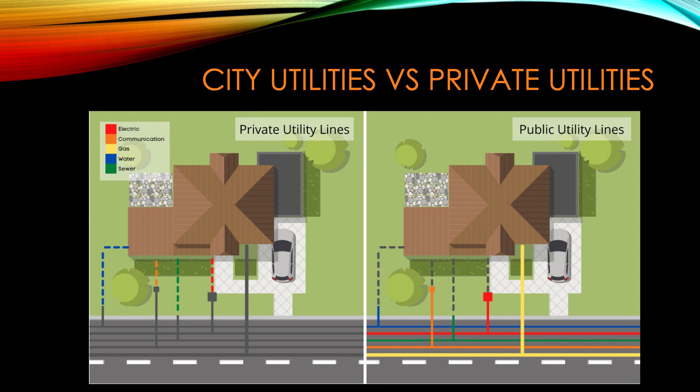Our sewer system - if you're on gravity sewer, the point of service for the city is closer to the street. If it's on a grinder station, the point of service is actually the grinder station. So we'll locate that all the way up into your yard and by your house, to make sure that if somebody's putting in a fence or palm trees or whatever for you, they're not disturbing the city lines and aggravating Joe and Eric.

We got another one on the left. You can see the green marks in the road, that's where our sewer line is. On the right side picture, you can kind of see a valve that's busted up into high grass, and if you look back in the bushes, you'll see a fire hydrant. So we own all the way up to the fire hydrant.

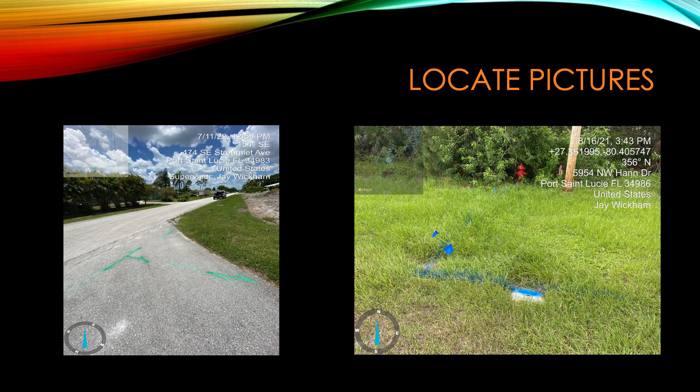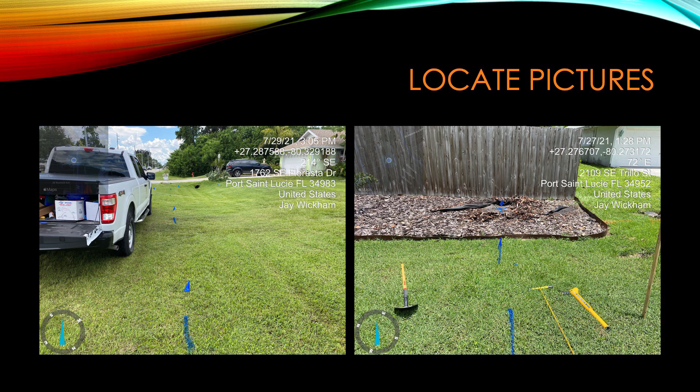Just another example. On the right side, somebody had mulched in a nice little thing right outside their fence, but the blue mark continues into it, and their water meter was actually buried under all that mulch. That's no fun, that's why you see the shovel out there. Our locator had to get out there, probe it, find it with a metal detector, and dig it up so we could have access to it. So please don't bury those.

This is what we're trying to avoid. Last year we had a contractor working on Port St. Lucie Boulevard, and we had an active locate, and it was good, but the contractor failed to see a valve, and when they were digging up the road there to do the widening, they busted the road.

On the right side, we have what's considered to be a 2-foot tolerance from the edge of pipe. So when we're marking these lines, we have to be within 2 feet of the edge of the pipe, otherwise the city is responsible for the fix. If it's within 2 feet, then we can usually hold the contractor negligent.

You can see our assistant director pointing at the fact that it was less than 2 feet, who happened to grace us in the back of the room, but he was pretty happy that day it wasn't a problem of one of my people, and it saved us a few thousand dollars that we were able to bill back to the contractor to fix. But it did cause a lot of headaches, because I believe that part of the road on Port St. Lucie Boulevard was shut down for almost a day, and that's no fun.

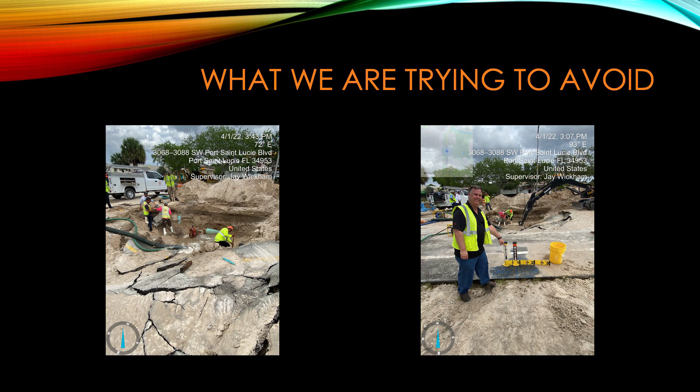So, the picture on the left, AT&T was doing a directional bore to bring fiber to all the people in the city, and they hit one of our old asbestos concrete water mains, and it shot a geyser up in the road above the telephone pole. Those ones are always fun.

And the picture on the right, you can kind of see the directional drill machine and the edge of pavement right there. I don't know if you can make it out, but you can kind of see the pipe in the ground. But we did not locate that one properly, so we had to eat that one, and get to sit in offices and have fun meetings when we're off like that.

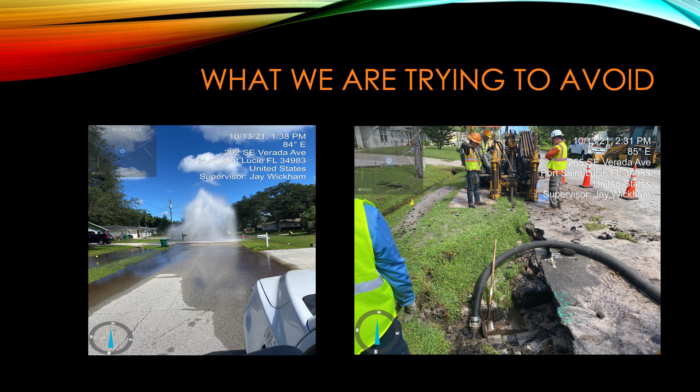So that's it for the locators. On the commercial development side, like I said, I have 8 full-time inspectors. In 2022, we had 96 open commercial projects, and we completed 4,737 inspections.

Now the 96 commercial projects, that's going to include - I'm not sure where everybody lives, but if you guys are familiar with Tradition, like Riverland's growing, so Riverland, one of their whole pods would be one commercial project. And then also, like when you see an Aldi's or something pop up, that's considered one commercial project. So 96 is a challenge to be everywhere and see everything that goes on at the same time.

So these are the required inspections that we do. On the right-hand side, this was a graph that one of our project managers came up with. But basically, we do a pre-construction meeting with the developer, the contractor, and everybody. We do a material inspection to make sure that everything is perfect and good before they put it in the ground. If there's a lift station, we watch the lift station be installed, first manhole set, and we just go from there.

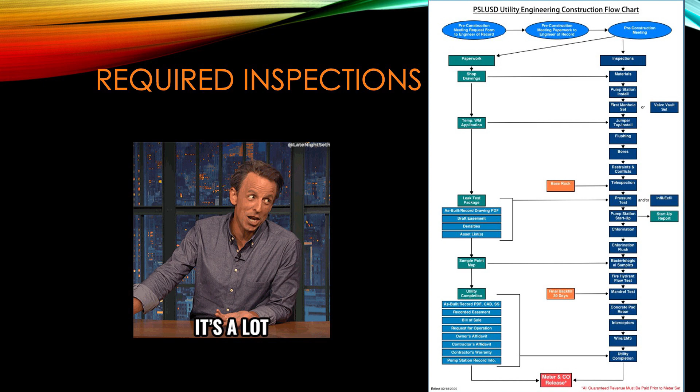We do a bunch of flushing and chlorinations and all that stuff before we turn water over, and try to keep everything separated from the drinking water that you guys are drinking out of. That way when they're doing all this testing, it doesn't contaminate the water that you guys are drinking or using. So it's a lot of fun.

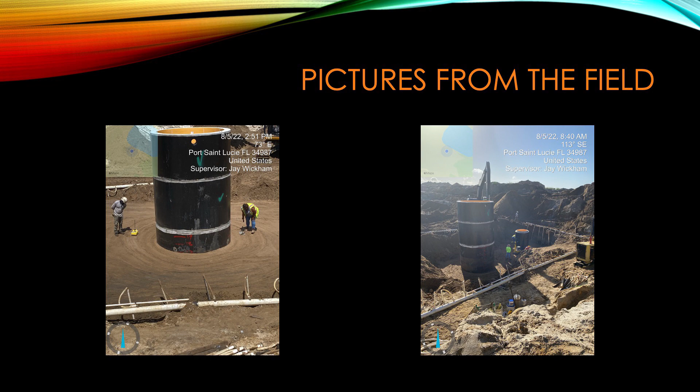So here's some pictures from the field. Both of these pictures are of a lift station being constructed out in the field. When you guys drive by these fences, you don't ever get to see the mass amount of preparation time that it takes to put these in the ground and make sure they're perfect. They come in sections, and they just put it together like a Lego set to get where they need to go, but they can be up to 30 feet deep around here. We try not to make them more than 25, but we have some that are a little deeper than 30 feet.

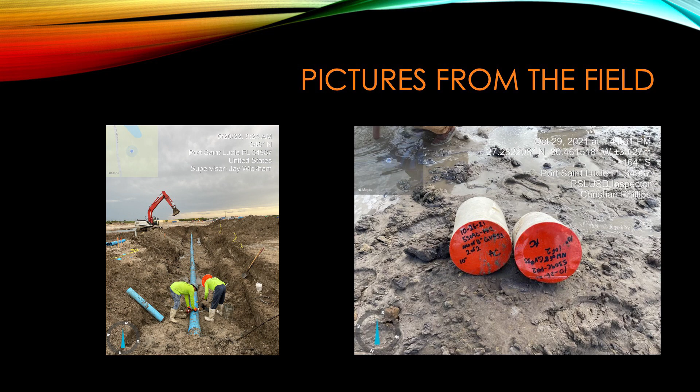I have a couple samples of that. Jenny's got one pig there, and the other one is the other style, the bullet-shaped one, but it's just foam. That one's a little harder foam, but that's what we use to get all the dirt out of the lines before we put the stuff into service.

These are clean, right? You clean these before I just touched them? These are clean? No? We don't pig the sewer pipes, so they're always clean.

This was a process that started during COVID. We had a major shortage in pipe, and we found out that when they turned the processing plants back on, they were so far behind that they just sped everything up and shot it through, and everything wasn't properly done. So the guys have been doing a good job making sure that we are not getting an inferior product. Unfortunately, this one was already installed, so the contractor had to go back, dig up the road, pull it out, and put new pipe in. But that's on them. We're going to make sure that we get the best product for the city so we don't have to keep paying for it down the road.

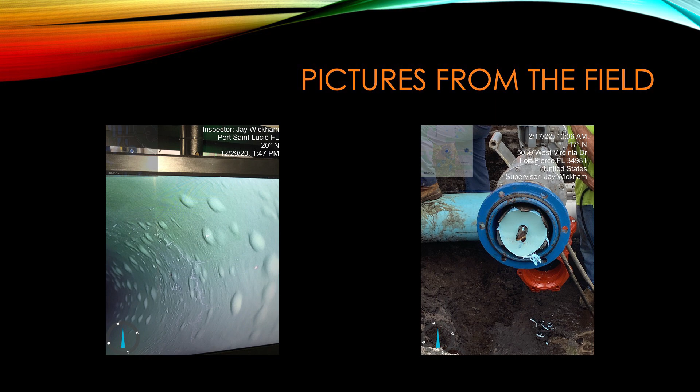I also have a demonstration of that, or a piece of that. This is the coupon that comes out from the PVC. You guys can see how thick the PVC is, but that's the outside of the pipe. And that's what comes out of that.

And then I always have fun pictures. This is more or less for my onboarding and orientation. I tell all the new employees stuff's going to happen. One of my guys backed into a tree, but always be sure to tell us when that stuff happens and don't try to hide it. That's what I tell the new people.

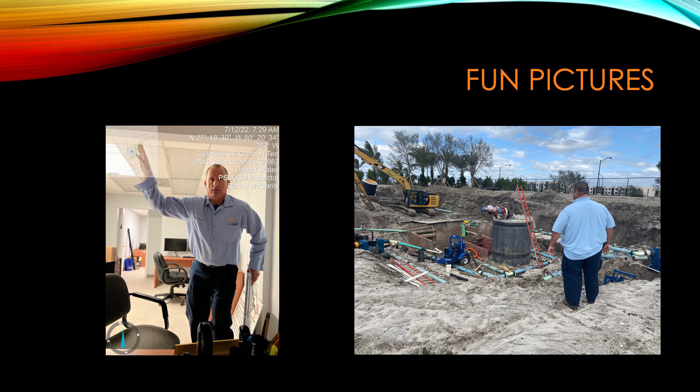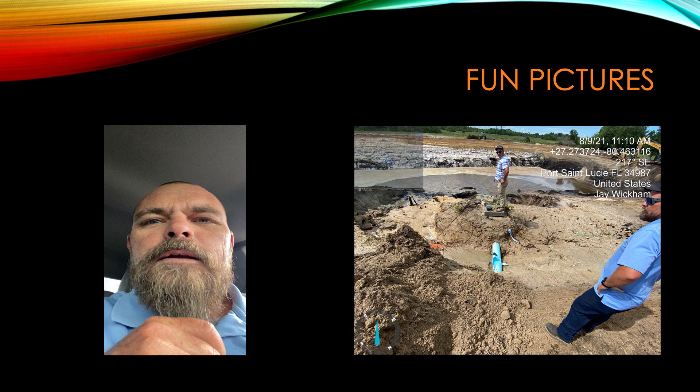We had to do Zoom meetings and Teams meetings a lot during COVID. On the picture on the left is another one of my inspectors. I always told him, you got to make sure your camera's off if you're going to look silly in a photo like that. Took it and put it up there for him. On the right, it's also Billy, another contractor on one of the jobs that was going to town and hit one of our water mains.

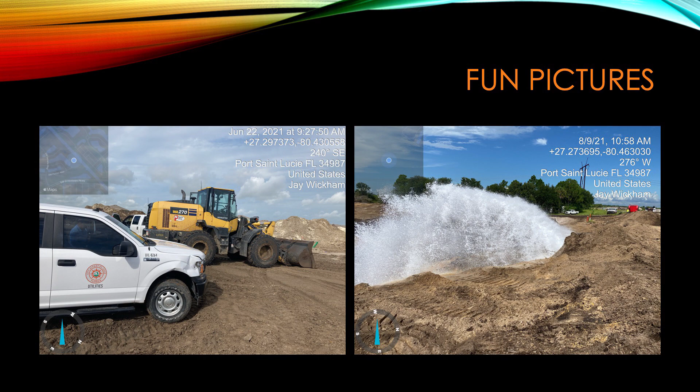So we're always having to go out into the field and dodge equipment. Well, one of our trucks didn't survive one day. It got backed into by that huge loader that's behind it. And you can see the picture on the right, that's also another water main break that happens on these new construction sites as they have water going through there and they're constructing it, people will come by and rip it out of the ground.

So that's all I got. If there's any questions, let me know. If not, I'm going to turn it over to Scott. Yep, very thorough.

All right, we're going to hand it over to Scott now. Thank you, thank you. Hi, everyone. I'm more of a behind-the-scenes type of person. I don't get to speak in public very often, so I appreciate coming out in front of some of the smartest people in PSL today. And I know you're smart because you're in the AC and you're getting a free lunch. So I appreciate you coming.

So once again, my name is Scott Mahar, and I'm the manager of Electrical Systems and SCADA. And as far as I know, the theme is underground, and some of my work, some of our data travels underground, is why I'm here.

I'll speak to the electrical part first. So I work with FPL, and I manage a lot of our rates for our plants. And the electrical service generally comes in overhead. And then on our plants, some of them are very diverse and large. They have many facilities on the plants, and that's all underground. And we have a lot of large pumps and large motors. They use a lot of electricity. So we try our best to manage costs so that those savings can be passed on to you, the customers.

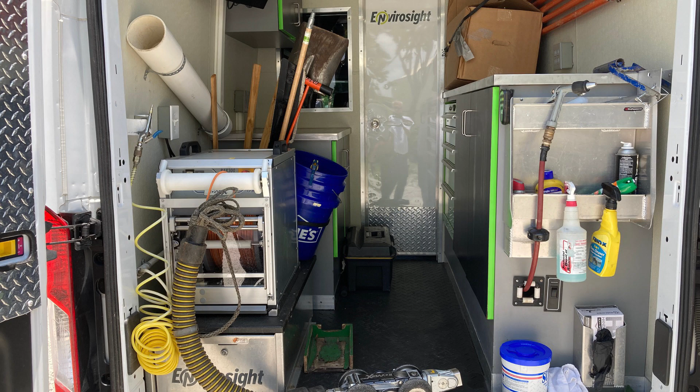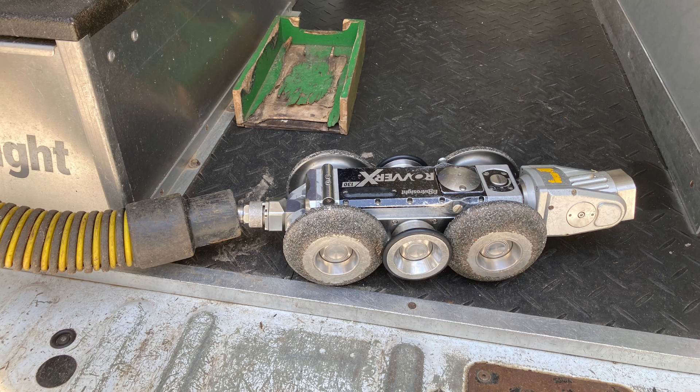So there's a little control room, like what we call the office. The guys have full control of the camera. This little device here, we call it a tractor or camera. It's got a camera on the front of it. Some people call them crawlers. There's all different names for them.

We lower that down through a manhole. We use the manholes that you see in the road, the large castings, steel castings. We'll open those up, lower this down. That's our access point to be able to maintain the sewers. We'll lower this down in, it has a cable attached to it. The guy sits in the office and can see what's going on the computer screen through the camera.

Drives along looking for any deficiencies, whether it be a broken pipe, separated pipe joint, or a lot of times we get damaged by other utilities. Phone, power, water sometimes. Directional boring, they can bore through our pipes without them knowing it. That's kind of where we all tie together. Jay's guys go out and locate the pipes. Sometimes they're...

Our guys are rarely off. Accidents happen. So when you're directional boring, a lot of times these people don't know how deep the pipes are, so they'll bore through one of our sewer mains. Being a gravity pipe, you don't know about it until it's too late, unless you get there beforehand, preventatively, and can televise it and see that. Then we have repairs we have to make after that. Then it's a who-did-it game.

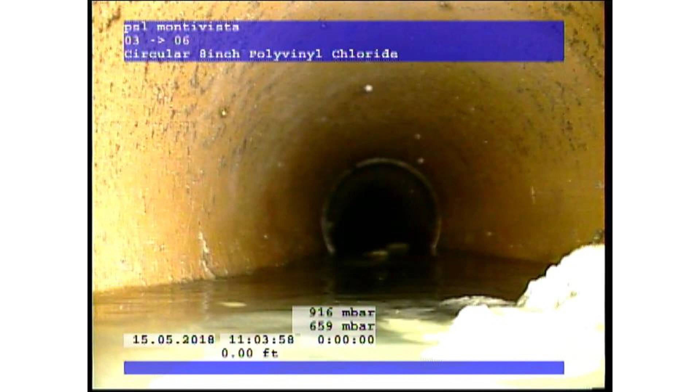So this is a picture of what the camera operator might see sitting at the computer. You can kind of see the inside of the pipe. I think Jay had one of these pictures in his slide, where you could see the inside of the pipe. Of course, his was new, his wasn't a used pipe like this one is. So sometimes we find some crazy stuff in there, but for the most part it's just sitting there looking at dirty pictures all day, I guess, right? Or dirty films, whatever you want to call it.

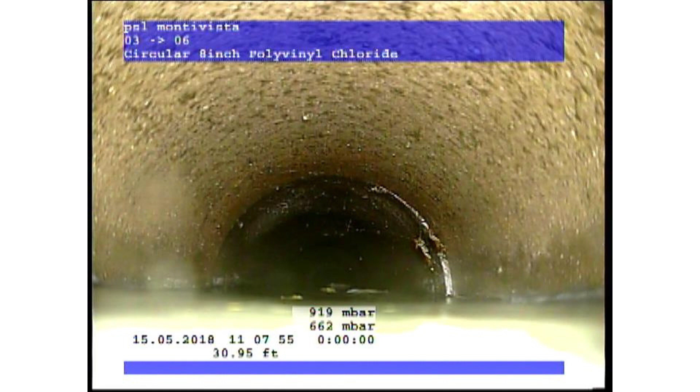So we can go through, and it's really not, sometimes it's exciting, but for the most part it's kind of a boring job. But that's kind of what we do.

So what we're looking for on the I&I, I guess I didn't touch on the I&I. Does anybody know what I&I stands for? That's right, inflow and infiltration. So our sewer mains, our sewer infrastructure is not designed to take on stormwater.

A lot of people, especially way back in the old days, sewer systems were combined. You had sanitary sewer, you had storm sewers, everything rolled together and just kind of went down the way. EPA came along and said, no, we can't do this, can't dump sanitary sewer into waterways. So now we have two separate systems.

Sanitary sewer systems are only designed to take on what we put down the drain, right, or sanitary waste. They're not designed to take on stormwater. So stormwater enters what we call I&I, inflow and infiltration, whether it be a break in the pipe, a leaky manhole. There's a thousand different ways it can get in there, but we want to keep it out. This is another way we monitor it. We go through and look for water leaking into our pipes and try to mitigate that.

Did I miss anything? I don't think so, I think that's good. I'm going to turn it over to Eric. He's going to talk. Yes, ma'am.

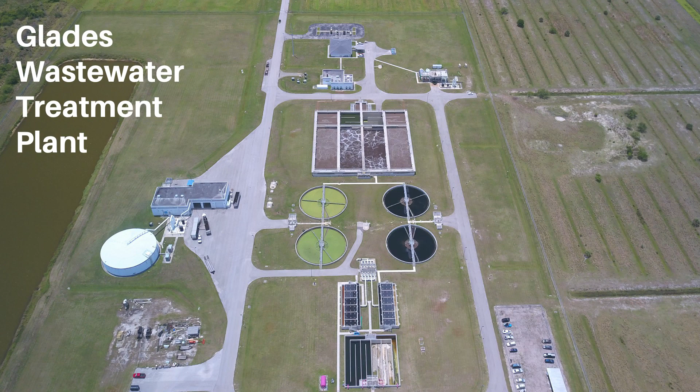I'm not really a process guy either, but our wastewater plants operate and dispose of waste via micro bugs. We feed them, basically they run off air, so we give them enough air that they eat whatever waste there is, and the byproduct comes out of that. We dispose of that, and then we run it through filters and chlorinate it to make sure any fecal coliform or anything like that is killed before it goes to reuse. Or here we dispose of it down a deep injection well, pumping it down 3,000 feet below grade to refurbish that.

If you've ever dealt with anaerobic bacteria in the water, you recognize it by the smell. So if you don't know the smell, consider yourself fortunate.

About how much land does it take for each of these plants? It depends. Our Glades wastewater facility, we actually have more land than we needed. We roughly have 400 acres that it sits on. The 12 MGD plant sits on probably 40 acres of that, and we need a little bit more for expansion. The 6 MGD plant is, I'm not even sure, I think it's on probably a 20-acre lot. It's on a little island by itself, so it's kind of isolated as well. With these processes, they're coming up with new processing that takes smaller land, but it's spread out to give the bugs the time to eat the waste we have.